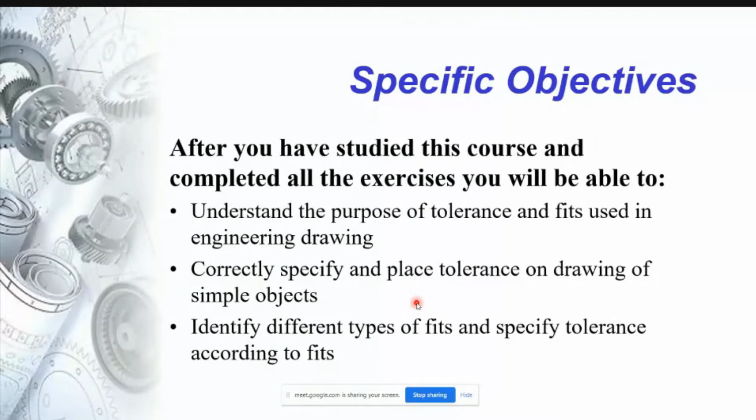Let's look at a drawing you may have already seen before. In the previous exercise, there is an assembly consisting of pulley number 1, shaft number 2, nut number 3, and washer number 4. In shaft number 2, there is a dimension with a suffix of G6. G6 is the tolerance for the shaft diameter. There is also another symbol here, N8, which refers to the IT grade of tolerance, and also the general tolerance of 0.1.

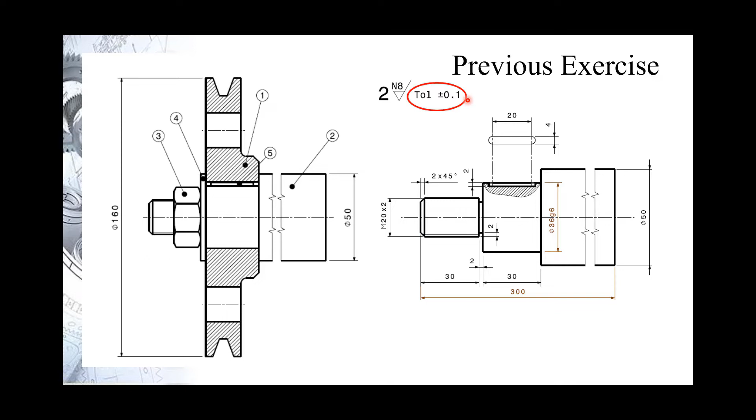Similarly, in the pulley, there is a tolerance. There is a hole with dimension of 36 H7. H7 is also the tolerance, and N8 refers to the IT grade of the surface roughness, and the general tolerance is 0.1.

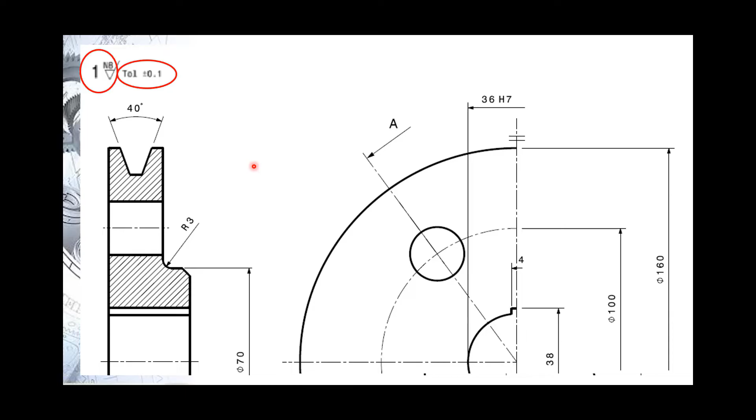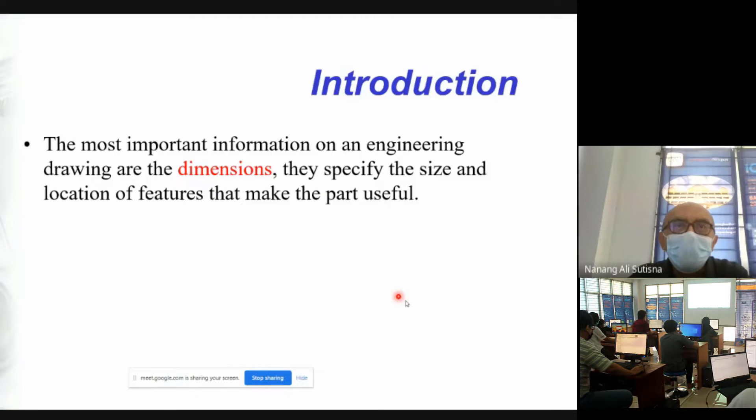But before going back, you need to understand that dimension is the most important aspect of the drawing. If you receive a drawing without dimension, you cannot make the part out of that drawing. Deviation from the exact dimension is unavoidable.

Why? Because of the nature of the manufacturing process, the person who makes the part is different, the machine used to make the part is also of different precision. An old machine and a new machine, a high precision machine and a low precision machine, will result in different quality, different dimension, deviation. There must be a deviation.

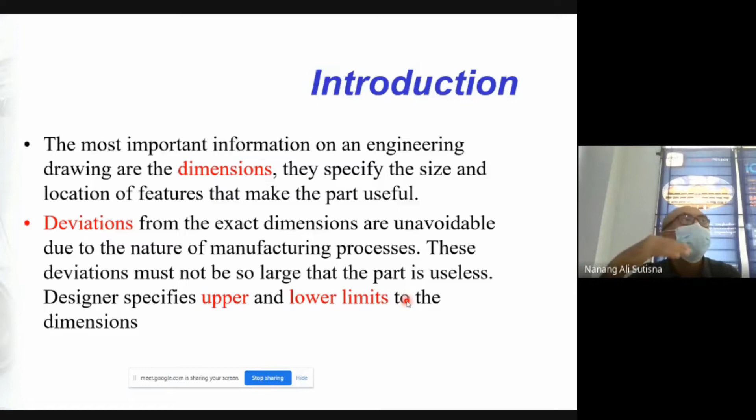So as a designer, you have to define how big it can differ from the basic size. So you will need to define the upper limit and the lower limit, so your part will be useful. Otherwise, it will not function.

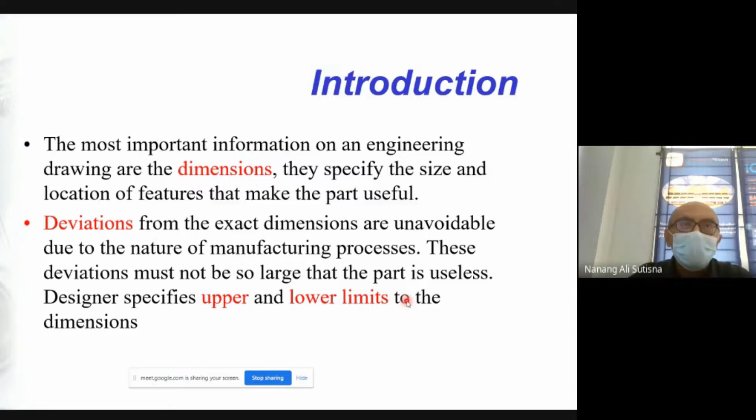Look at what is the tolerance. Tolerance is simply the difference between maximum and minimum size limits. So when you have this basic dimension, you may define diameter maximum and diameter minimum.

You can see here, the shaft will always be made smaller than the basic size. The basic question: if you make the hole 10 millimeters and the shaft is 10 millimeters, meaning 10.0 and 10.0, do you think it can fit? Cannot fit, sir. Cannot. Yeah, cannot. The shaft must be smaller than the hole. And how much smaller? That's the question.

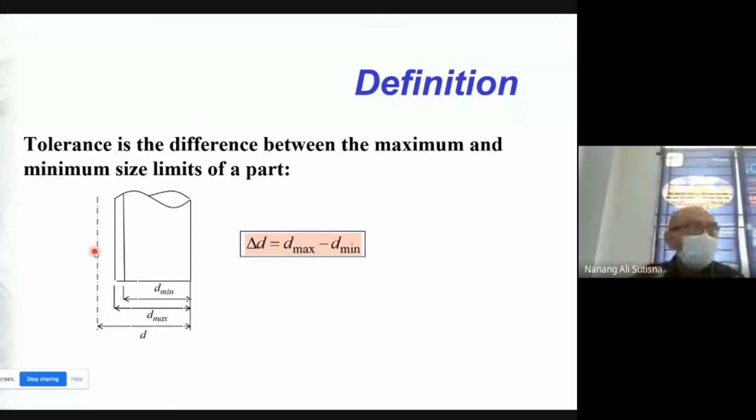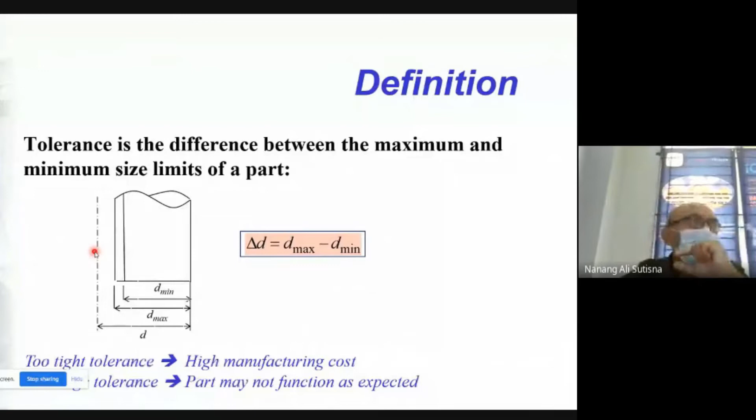So it's governed by the standard tolerance. Our concern is: if you make the part with a very high tolerance, a very tight tolerance, then it must be made by a very high precision machine, so it will incur higher cost. If you want to make it very precise, high precision, then the part will be expensive. But if it has very low tolerance, then the part may not function. It's too loose, for example, because the difference, or the tolerance, is too big, so it might not fit correctly.

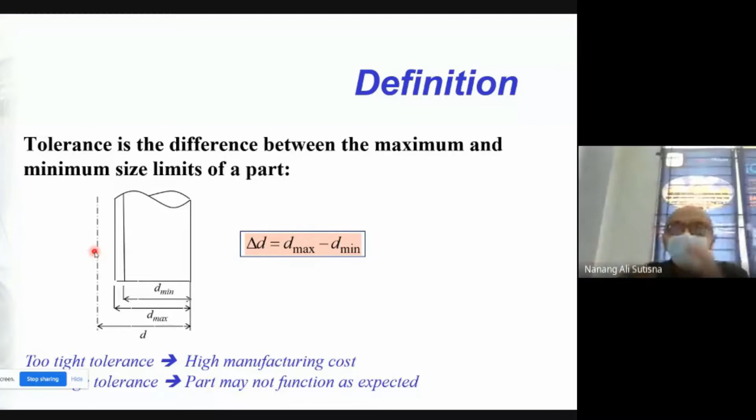Let's say this example: if the dimension is 50 millimeters plus minus 0.1, that means you can make the part between 50.1 and 49.9. It cannot go bigger than 50.1, or it cannot be smaller than 49.9. So your part will be in between. That's why you can make it anywhere.

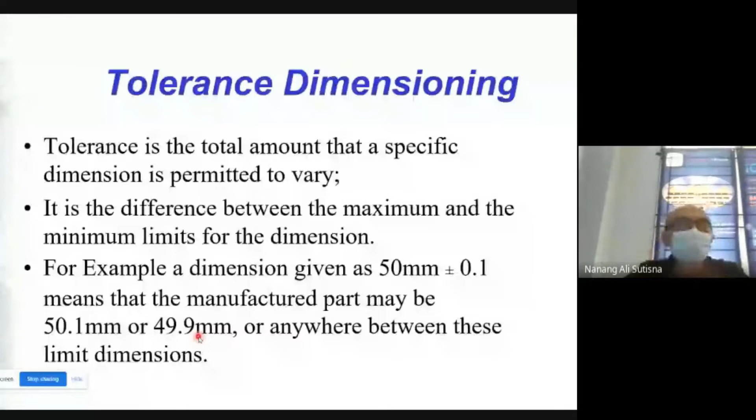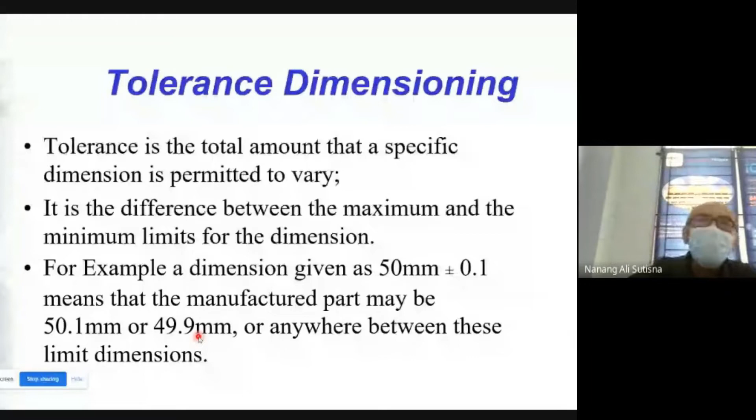But as long as it is within the range of the limits, then the part will function. Right? This is the illustration: the hole with 50 plus minus 0.1.

But the shaft cannot be using 50 something. It must be 49.8 plus 0, meaning that it cannot be bigger than 49.8, and it can be smaller, minus 0.1. So the shaft will always be smaller than the hole.

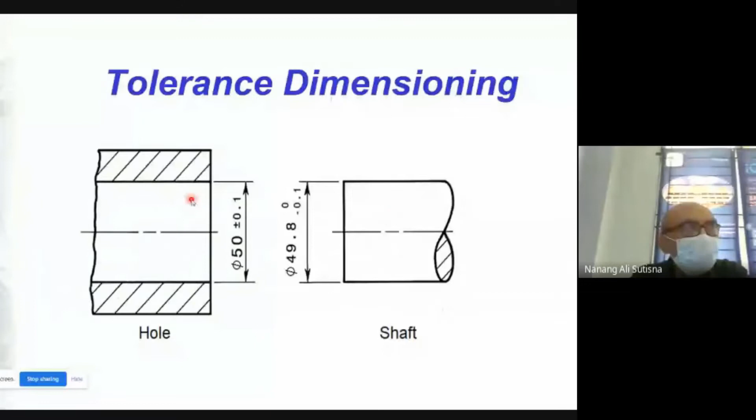Suppose that the hole is made at the lower limit, which is 49.9, and the shaft is at the maximum size, which is 49.8. It still can fit in, because the shaft is smaller, 49.8, and the hole is 49.9.

How is the tolerance written? This is important for you. If you look at this, it is the tolerance. The upper dimension is the larger size, and the lower is the smaller size.

Or it can be like this in the hole, or it may be written in the single form. You put the lower limit, then put a dash, then the upper limit. So this is one way of writing the tolerance.

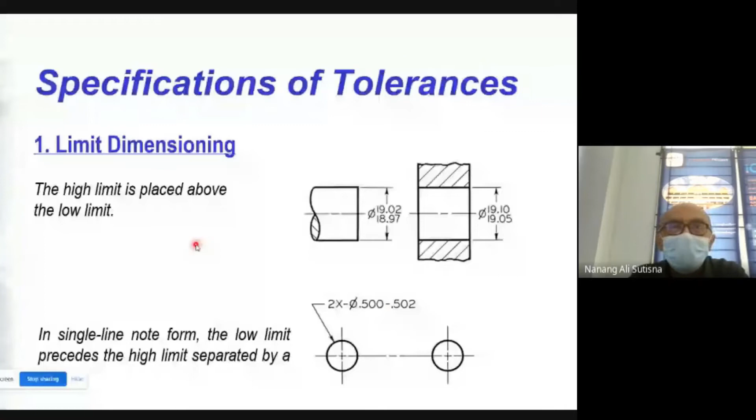The second way of writing tolerance is using plus or minus dimension. There are two types. The first is unilateral tolerance, where it only goes from 0 and bigger, or from 0 and smaller, just one direction, either smaller or bigger. So in this case, it is 47.70, cannot be bigger than that, but it can be smaller than 47.70 with a tolerance of minus 0.05.

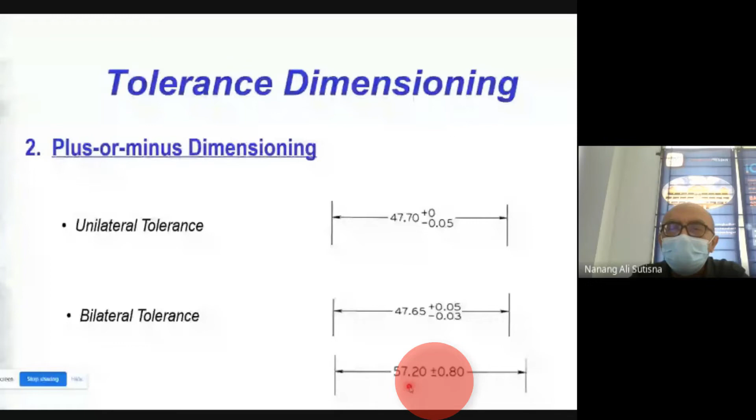Or it can use the bilateral tolerance. So you will have 47.65 plus minus 0.05, plus 0.05 and minus 0.03. As well, you can use the same value for plus and minus, like 57.20 plus minus 0.8. The cumulative tolerance.

30.00 to 29.95, so the tolerance is only 0.05 here. But what happens if all of these are also given a tolerance of 0.05?

Let's say you make it 9.95, 9.95, 9.95. You are at the lower limit. What is the total dimension here? If you make it only at the lower limits for all of them, what is the total dimension here? Can you calculate this?

29.85. Is it within tolerance or out of tolerance? Out of tolerance. Your lower limit is 29.95, and in actual, you make it 29.85.

So what's wrong with this dimension? It's supposed to be only two dimensions that are important, and you remove one dimension that is not important. If the total is not important, then you remove this when you make a drawing. If this part is not important, then you remove this. Or if this part is not important, then you remove this dimension. You cannot use this duplicate dimension.

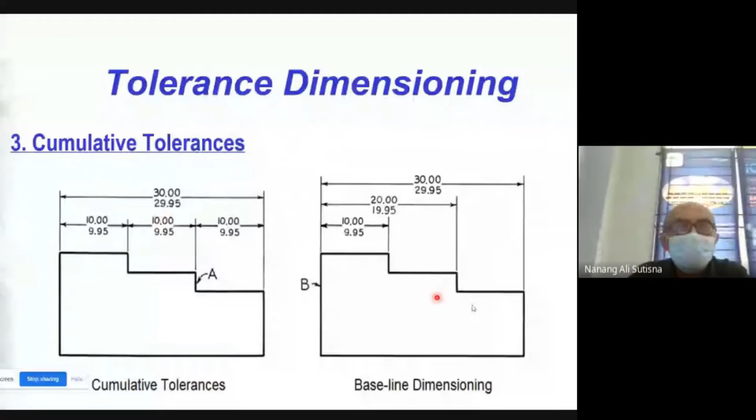So you can look at the right picture here. The dimension is not important. Okay, this is the basic understanding of the deviation.

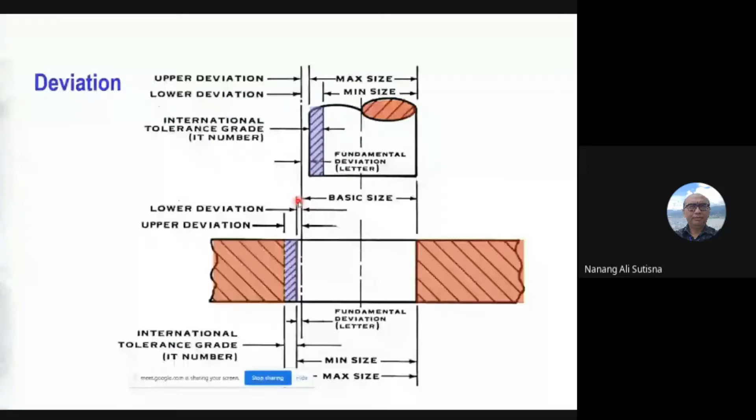There is a so-called fundamental deviation here. This is a basic size. The basic size of the shaft is the smaller size here. But the basic size of the hole is the smaller size of the hole, though the basic size of holes will be bigger than the basic size of the shaft.

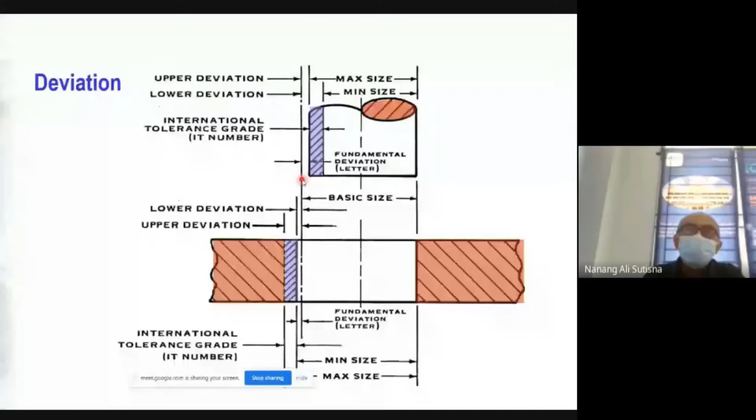So if you look at this, a capital letter means that it is the tolerance of the hole. If you see a lowercase letter, it will be for the shaft tolerance. So if you combine the fit, it will be 50 H8/f7. The hole will have H8 for tolerance and F7 for the shaft tolerance.

What is the value of H8 and F7, for diameter 50? I would like to introduce you to the IT grade. When you look at this, it is 8 and 7 here.

If you make it grade 8, then the process will be center lathe turning, boring, or reaming. If you say this is grade 7, then it must be high quality turning, broaching, or reaming. So this is the quality of the surface, and it is related to the tolerance.

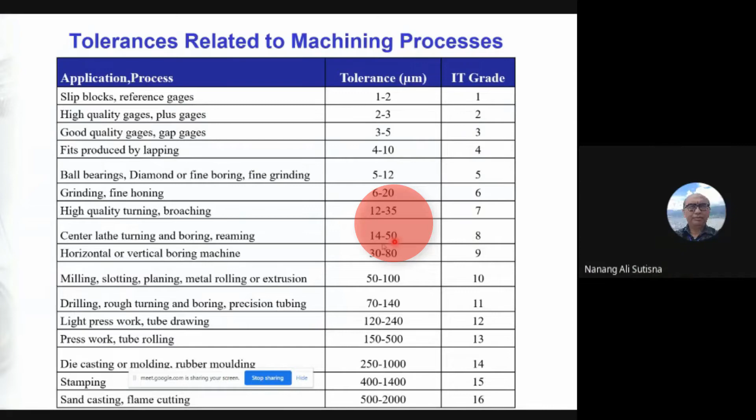If you choose grade 7, then the tolerance is between 12 micron to 35 micron. If you choose grade 8, the tolerance is between 14 micron to 50 micron. So this means IT grade 8, IT grade 7.

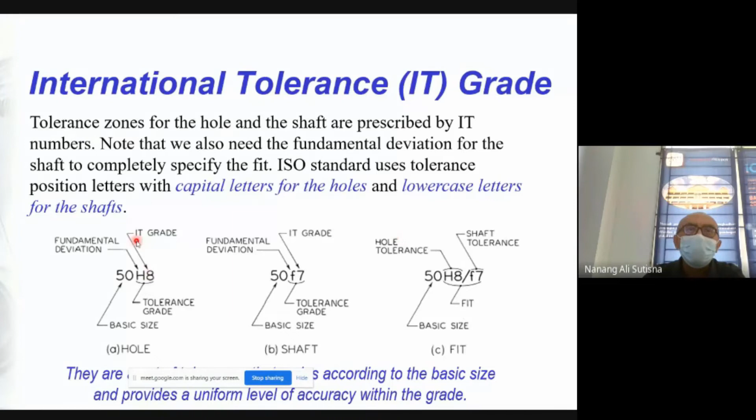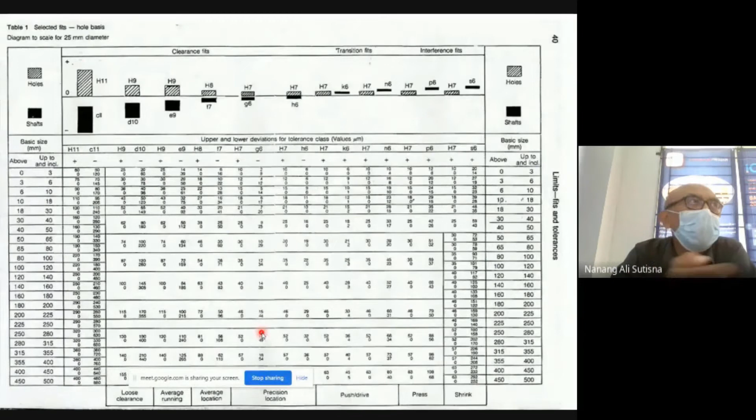And what does H mean? This is the most important table for a designer or a manufacturer. When you receive a drawing, it says the hole is H7 and the shaft is G6. What is the size? What is the tolerance?

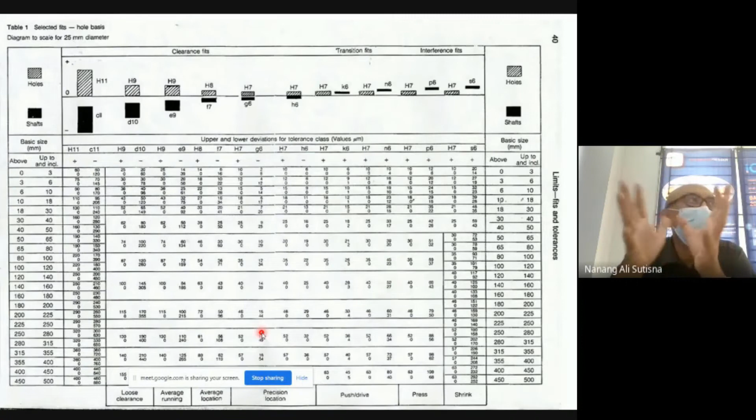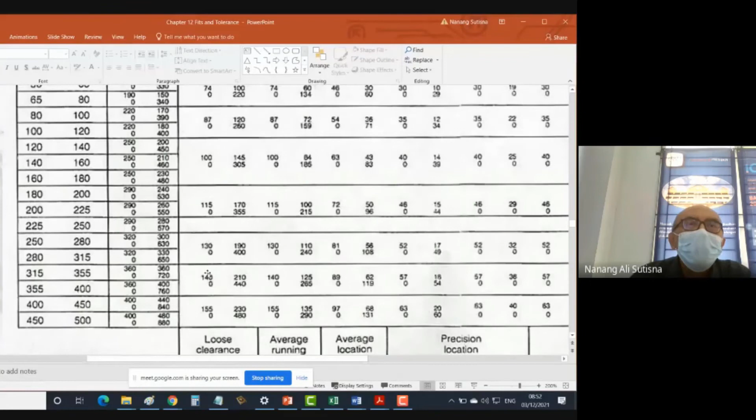Now let's look at this table. I think I'll make it bigger. First of all, look at this number. Can you all see this? Online students, can you see this number here? Yes, sir. Okay, good.

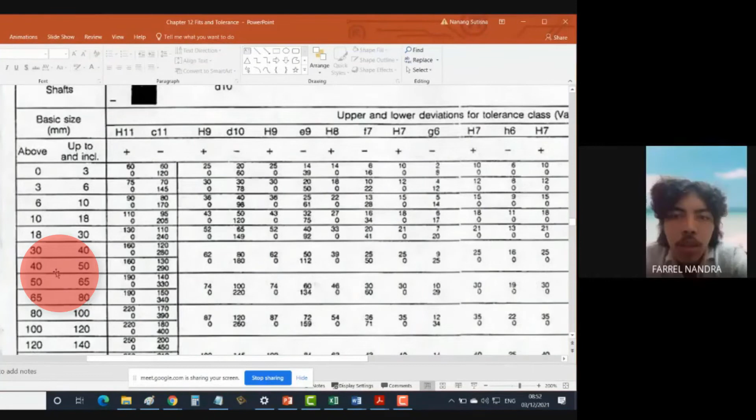So our size is 50, right? Before it's 50, right? 50 millimeters here. So it can be here, or it can be here. Or if in between, then you can use this as well.

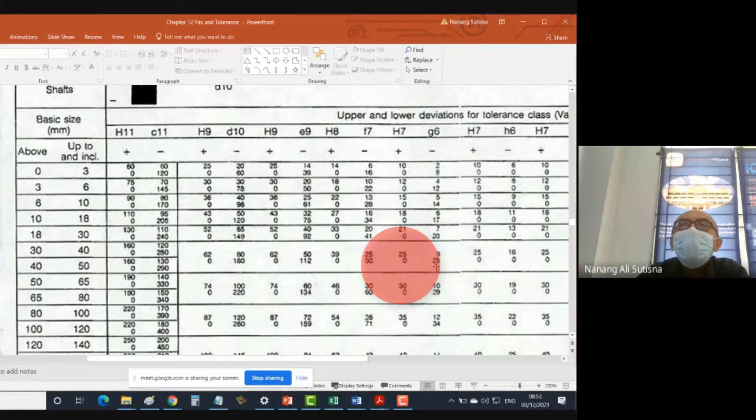When the diameter size is 50 millimeters, go to H7 and g6 here. H7 for hole uses a plus sign, and this is 25 and 0 in micron. So your size is 50 plus the tolerance 0.025 and 0. So this is the value of the limits.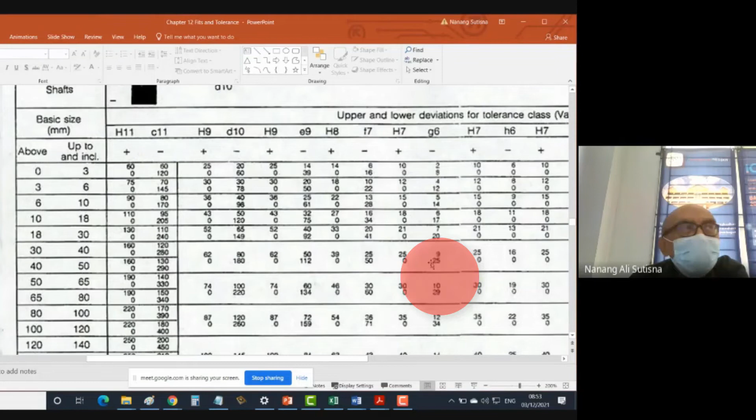And the shaft is minus, G6 is minus. So 50 minus 0.009 and minus 0.025. So this is the tolerance.

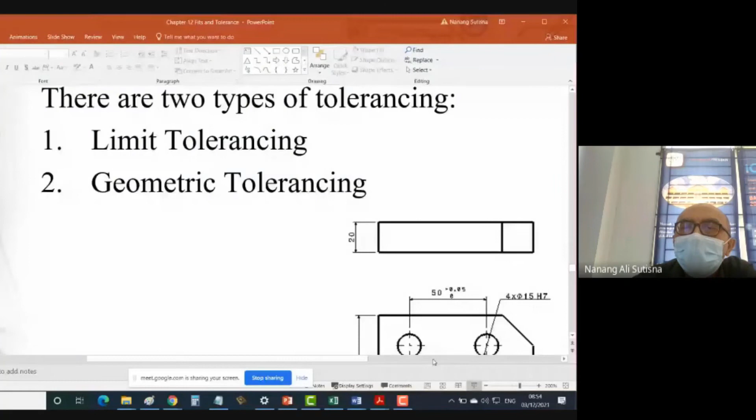So there are two types of tolerance. What we have talked so far is the limit. And what is the geometric tolerance? Here you have 20 millimeters, and the distance is 50 plus 0.05 and 0.

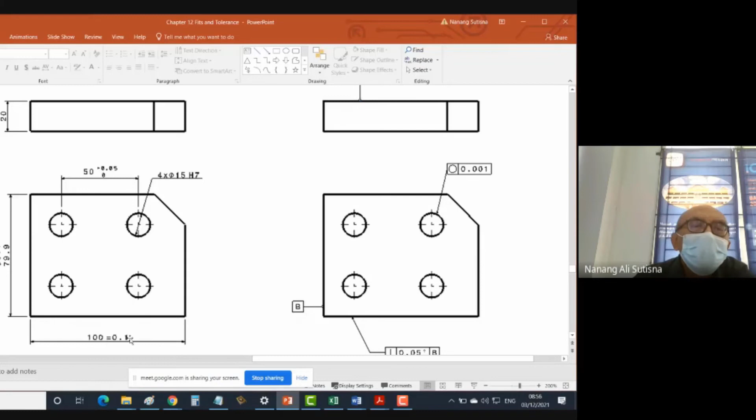And this size is 80.1 maximum and 79.9 minimum. And this size is 100 plus or minus 0.1. So it's called the limit tolerance, only for dimension.

What if we want this side perpendicular to this side, or this side parallel to this side? Then you use geometric tolerance.

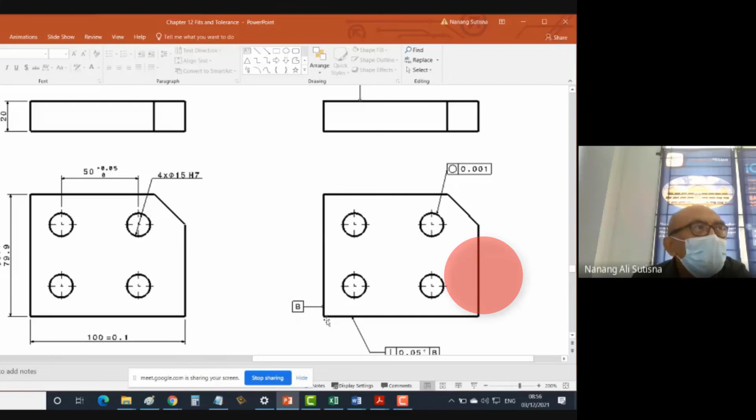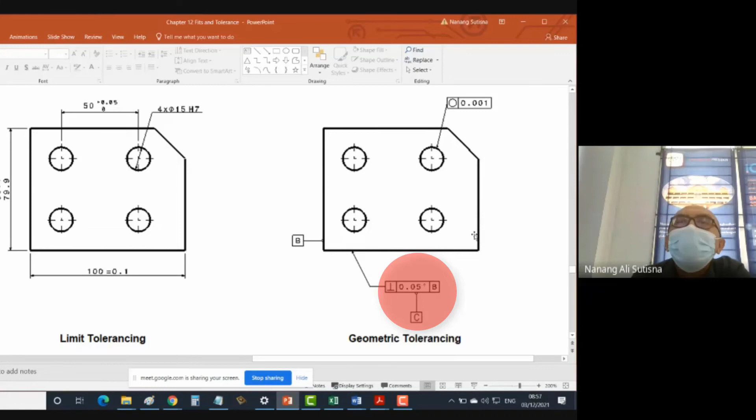So if you look at this symbol, it means that B is datum, C is this datum, but C must be perpendicular to B, and the tolerance is 0.05 degree. And this is the circularity or roundness.

It cannot be oval, it must be round. And the tolerance is 0.001. So this is the so-called geometric tolerance. Any question?

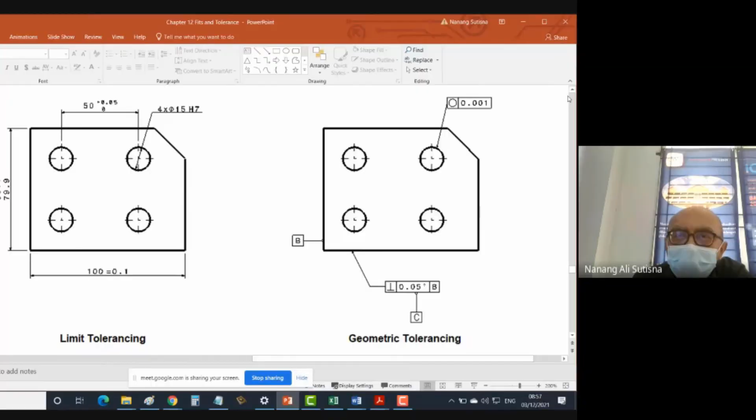Sir, I saw the symbol M. Can you explain it again, sir? What does that mean? Okay, M is the maximum material condition. It means that...

Yes, sir, one more, sir. I saw there's a lot of datum in that part. To determine the position of the datum, does it depend on the engineer, or are there some standardizations?

No, you need to understand how this part is made. The first datum must be the one that touches the table of the machine, because all other sides will be based on that datum. For example, you make this part, then your first datum will be this, and the other here will refer to this datum.